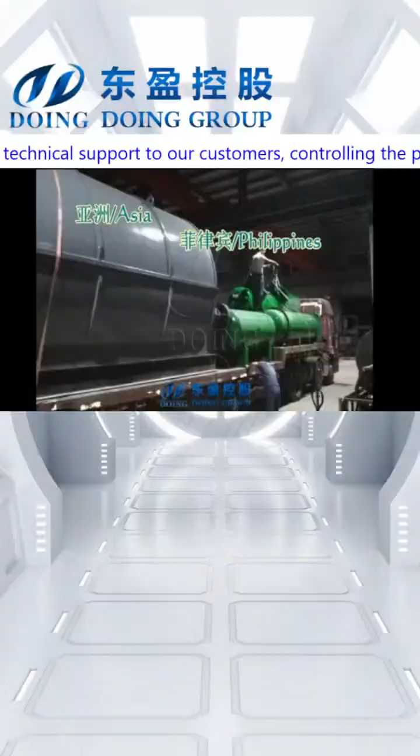Today we're going to share some information about our project cases from different continents. We are a manufacturer of waste tire, waste plastic pyrolysis plants. If you're interested in this kind of business, you can contact with us.

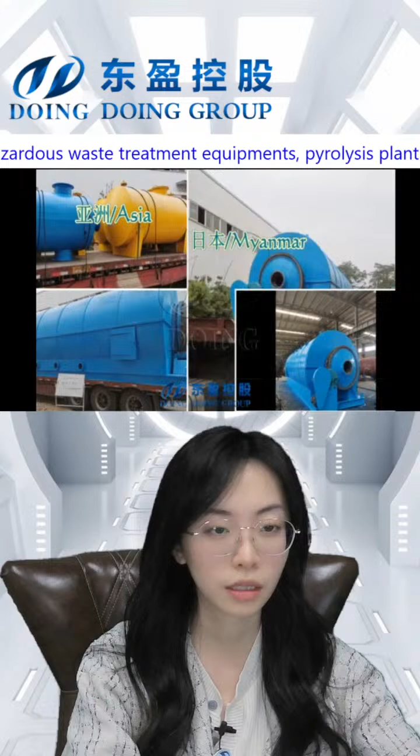So what can our equipment do? We build equipment for the pyrolysis business. We can process waste tire, waste plastic, oil sludge, like coal tar oil sludge, using pyrolysis technique to get fuel oil, carbon black, steel wire, aluminium ingot, or other products like powder or coal powder. This is what our project can do.

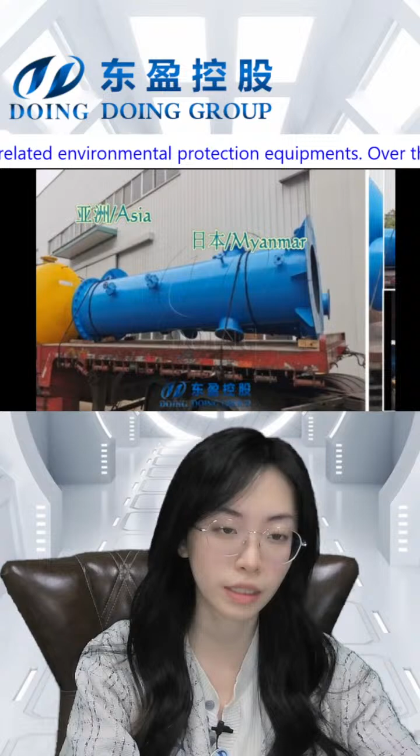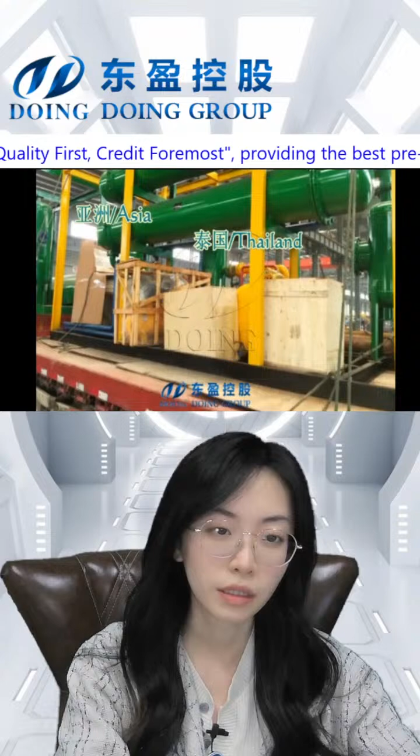Different products depend on different raw materials. We have two kinds of raw materials: solid waste and hazardous waste. Solid waste mainly includes waste tire, waste plastic, and some construction waste, daily waste, medical garbage.

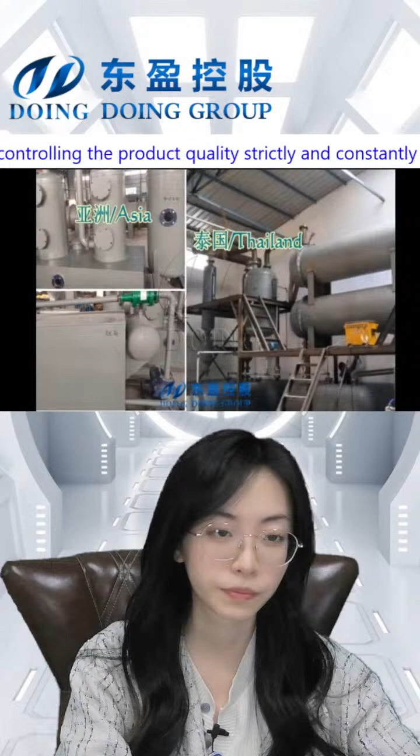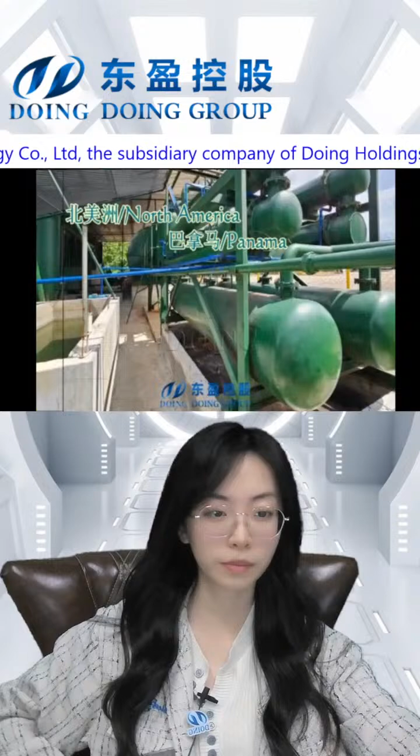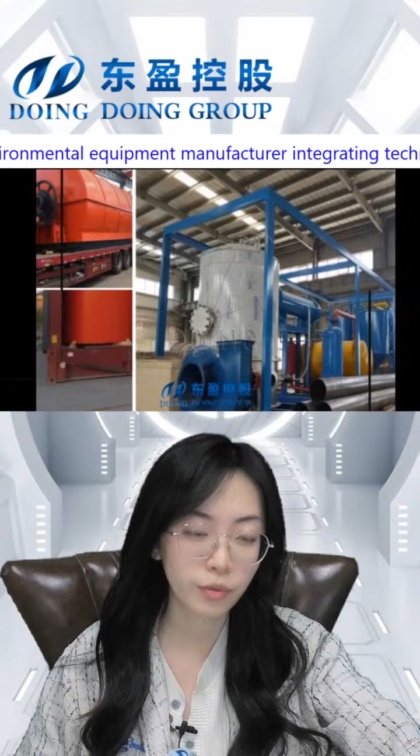This is what our company does. We are a Chinese manufacturer located in Henan province, China, and we have our own factory in Jiaozuo City, Henan province, nearby our company. The factory occupies more than 40,000 square meters. It's very large, with many prototypes and equipment waiting to be delivered.

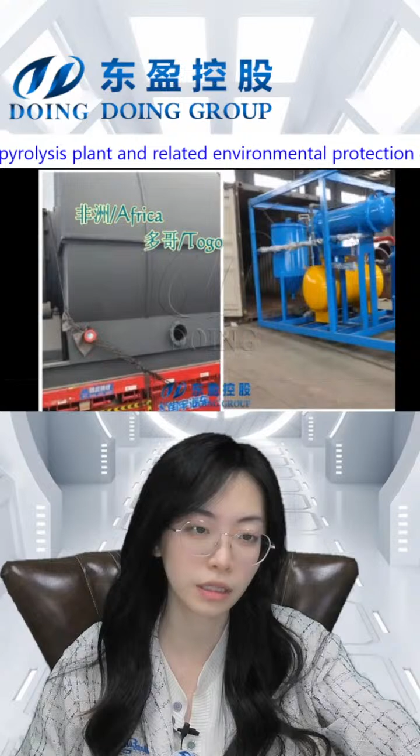You can come here and know more details about the equipment. The most expensive part of this equipment is the reactor. You can see how the reactor is built, what materials we use, and what techniques ensure high efficiency, long service life, and a safe production environment. This is some pre-sale service for you.

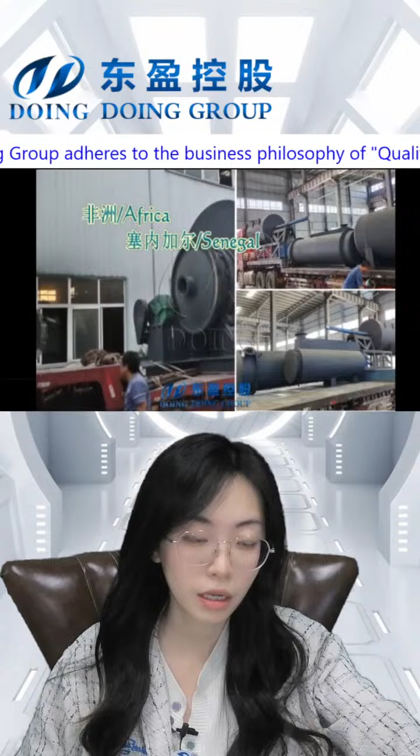You can come here if you want to do an experiment about your oil yield, depending on your material. You can also send your material to us at our factory, and we can give you a free service to test your raw materials. This is the service we can give you.

In this video you can see project cases from all over the world. Now it shows South America. Can you see here is the reactor for waste tire. We have three kinds of equipment: the batch type pyrolysis plant, the fully continuous pyrolysis plant, and the semi-continuous pyrolysis plant.

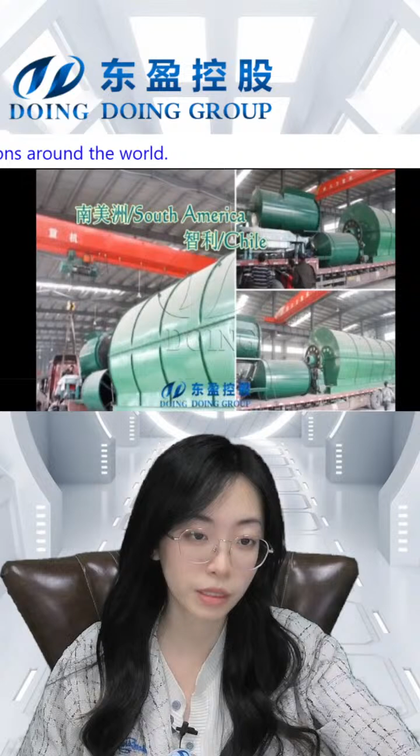What is the best equipment depends on your material, your capacity, and what device you need. It depends on your material - like if your material has paraffin, you need a dewaxing system, or you may need an odor removal system, or a pre-processing system.

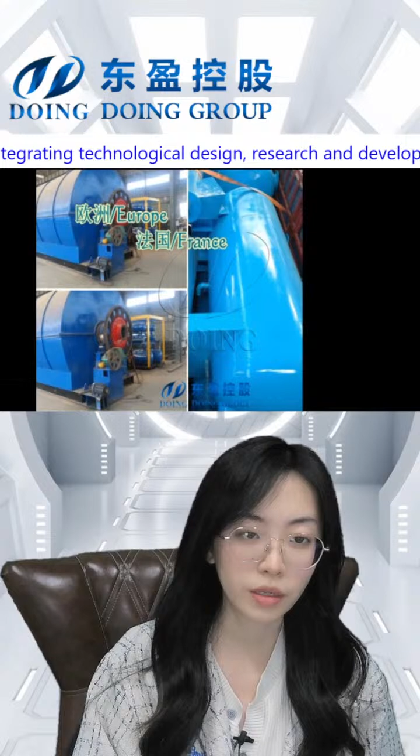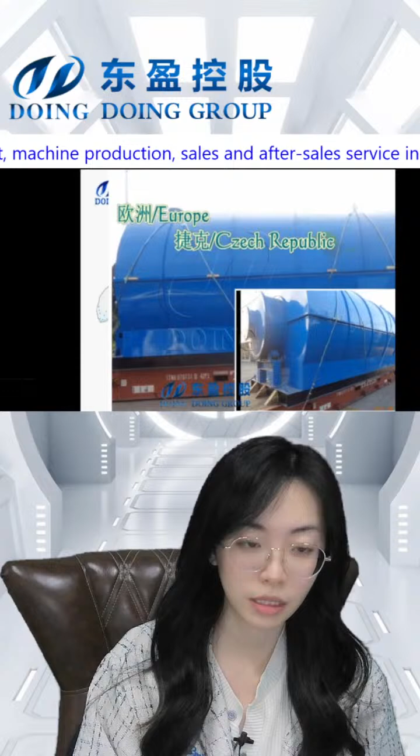Let me introduce our company again. We are Doing Group. We are one of the subsidiary companies of Doing Group, which has 7 companies. This company is one of the branches that serves waste tire, waste plastic pyrolysis equipment, and waste engine oil, waste pyrolysis oil, waste lubricant oil distillation equipment.

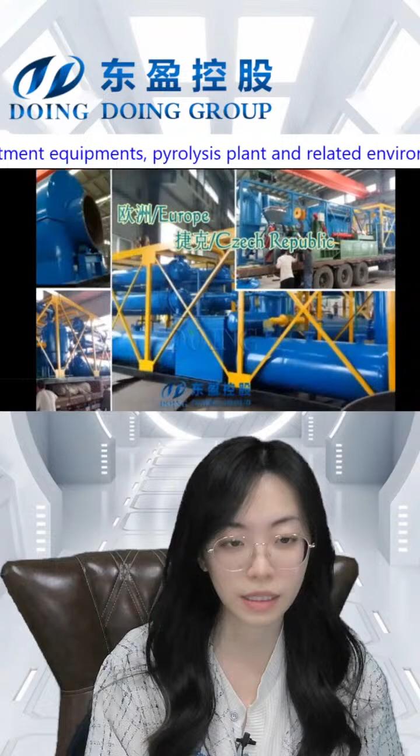There are 2 kinds of equipment, so if you need them you can contact us. These 2 kinds of equipment have different raw materials and different capacities, so they have different configurations. We can give you a program depending on your requirements, or we can design a different plan for you.

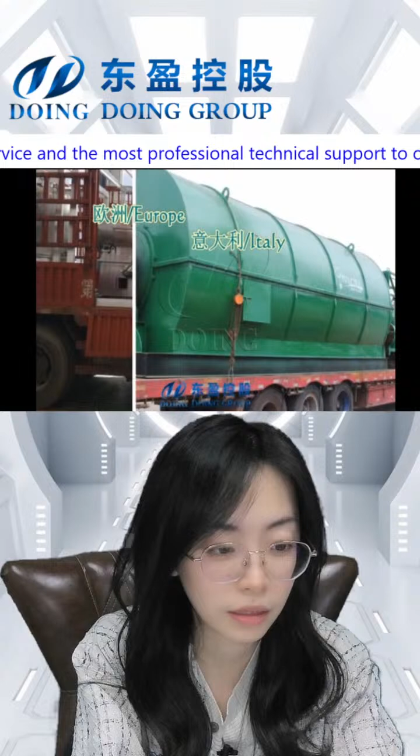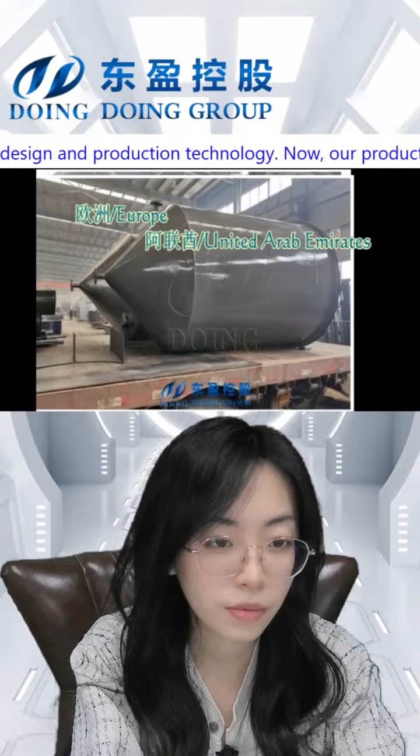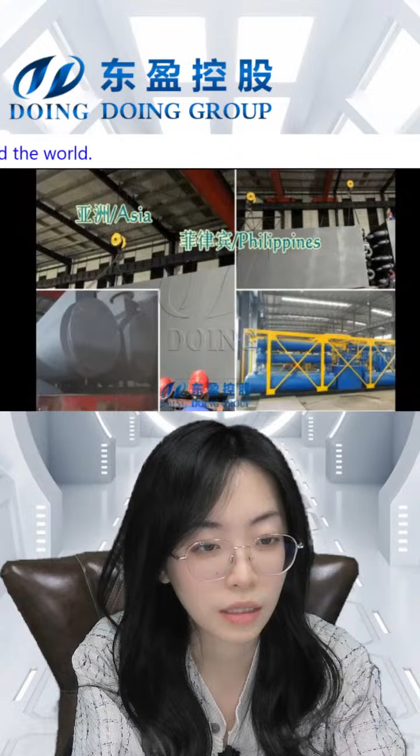We can introduce you to our equipment, their advantages, what materials they can deal with, and how many materials they can process every day. We can also give you an introduction to our project cases, like which countries our customers are in and what different customers bought from us, as well as the parameters and technique of the equipment. So what are you interested in?

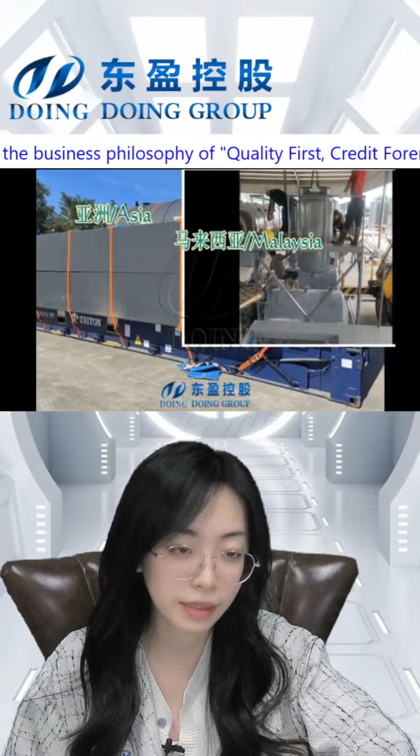Some of these are just daily waste that we can't just dump randomly. We purify them using distillation technique to upgrade the quality of the oil. The products we get are fuel oil and non-standard diesel that can be directly used in agricultural machines, mining machines, or diesel generators.

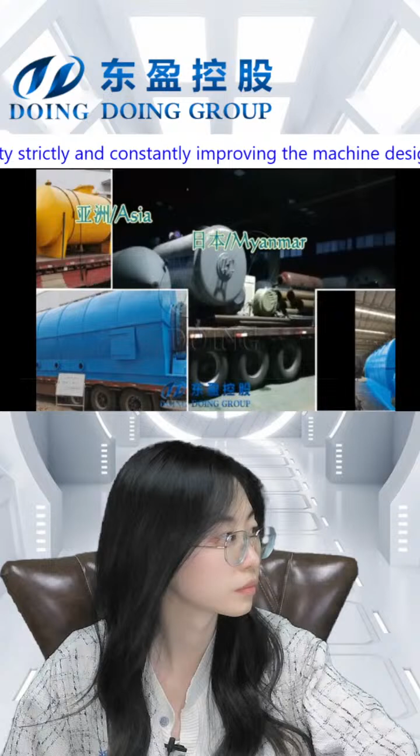So if you have any questions, just leave them. Here are also some customers in Thailand, because we are now in Asia, so we have many customers in Asia. But on other continents too, we have customers in South America who bought our batch type pyrolysis plant, and in Africa most of our clients bought the batch type.

In Europe, America, Russia, and some other countries, customers bought the fully automatic continuous pyrolysis plant. This newest technique is larger, has higher efficiency and bigger capacity. It's also much more expensive, but the efficiency is much higher, so we can process more materials with the fully continuous pyrolysis plant.

This is the customers in Thailand. Here are some pictures of equipment waiting to be delivered at our factory. You don't need to worry about the transportation.

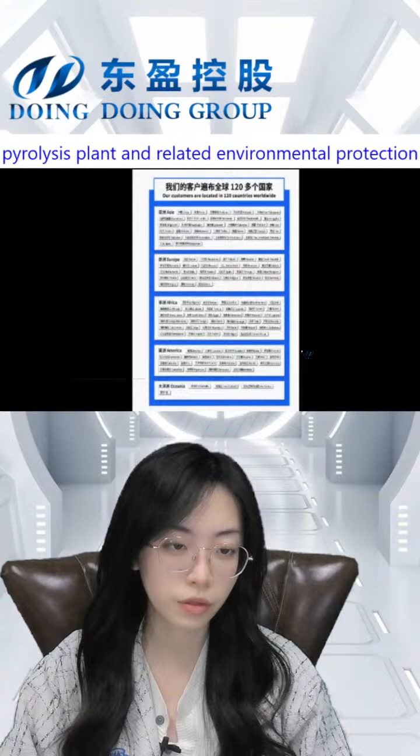We have a cooperating company to help you, whether you are in China or on other continents, so don't worry about the shipping problem. Also, if you're worried about installation, if you have an engineer you can build and install it yourself. But if you need our engineer, our engineer can come to your workshop to help you with installation, operation, and debugging the system.

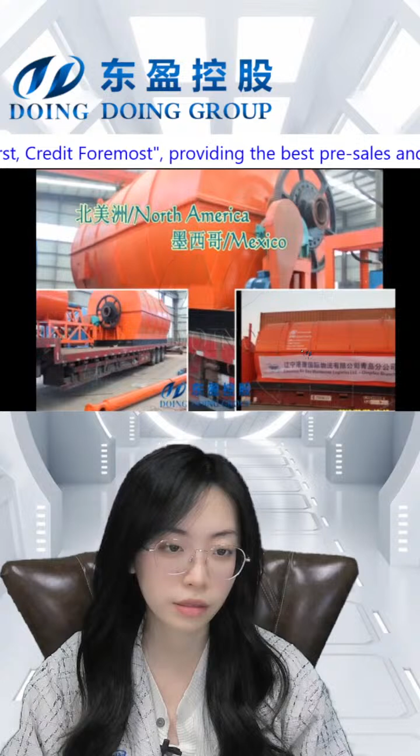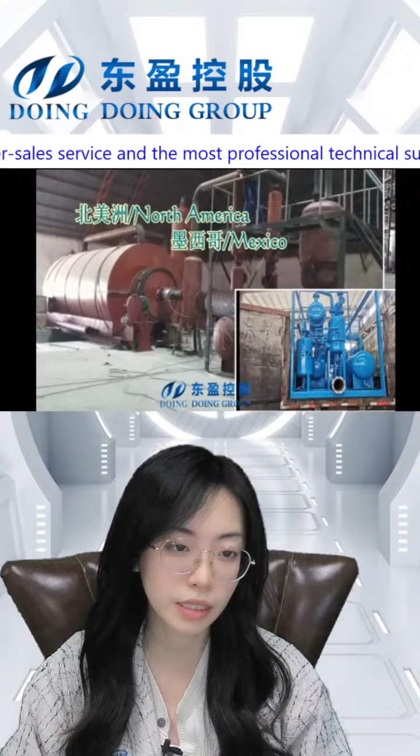Training can also be provided by our engineer. Training the workers for 3 to 5 days can help you know more about how to run our equipment more efficiently and in a safer environment.

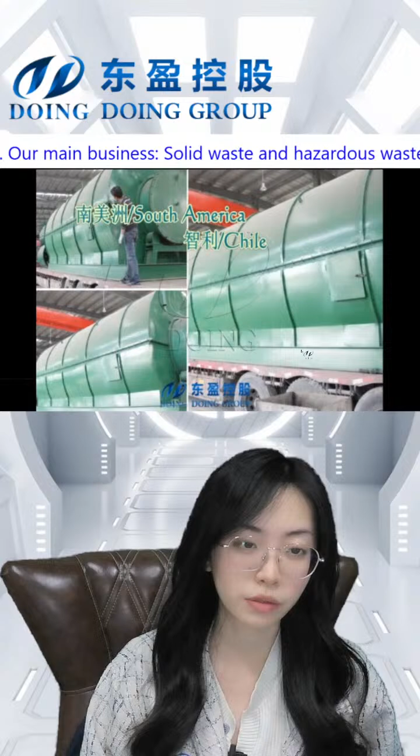You can come to visit our client's factory in your continent or region. But if you want to visit, you need to contact our sales manager first, and we'll tell you when it's convenient for you to visit there.

Here are some customers in Europe. This is a pyrolysis plant unit for smaller capacity, which you can use privately or at some college. Customers bought this kind of equipment to experiment and to learn the data, or for private use, like some farmers or small factories who need burning energy or diesel will have the pyrolysis unit.

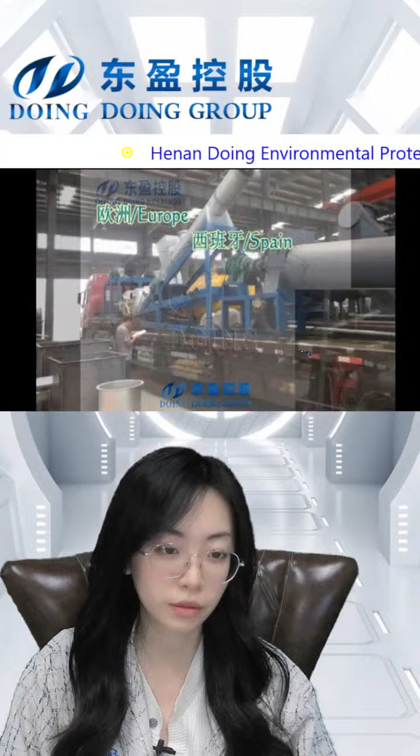These are also some countries, some customers in Europe, because the policies for purification systems or environmentally friendly ways are strict in Europe. So we have different programs to help you purify the gas release. We have high quality purification devices, normal size and normal type. Depending on your region and your policy, we'll give you a program so you can get the certificate for the purification system.

Is there anyone in my live show? We are Doing Group, building equipment that can be used to pyrolyze waste tires and waste plastic, and get fuel oil, carbon black, and waste steel wire from these waste materials.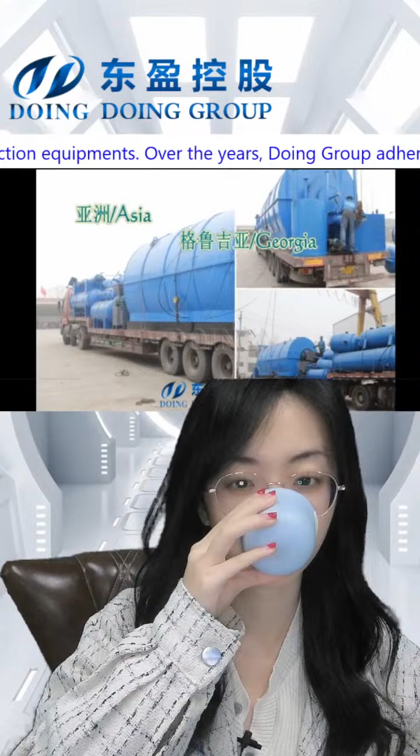There are some cases from our company at Doing Group, and here are some pictures of our clients and videos of our factory. Here is our factory in Jiaozuo City, Henan Province, China. Here is one of the workshops for the reactor. You can see here the prototype. If you come here, the first machine you will see is this 15 ton batch type pyrolysis plant. Here is the reactor, and here is the condensation system.

This is one of our clients in Shanxi Province, China. Their raw material is oil sludge, coal tar oil sludge.

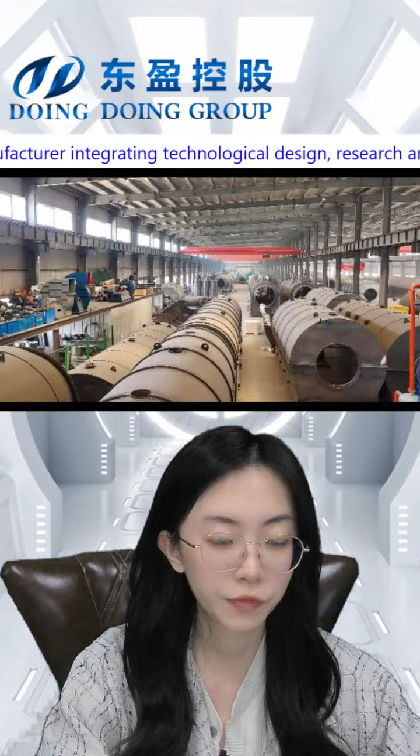So here is some information about our company and our clients, you can have a look. During this live show, if you are interested in some equipment, you can leave a comment, and I can give you a brief introduction of this equipment or client information.

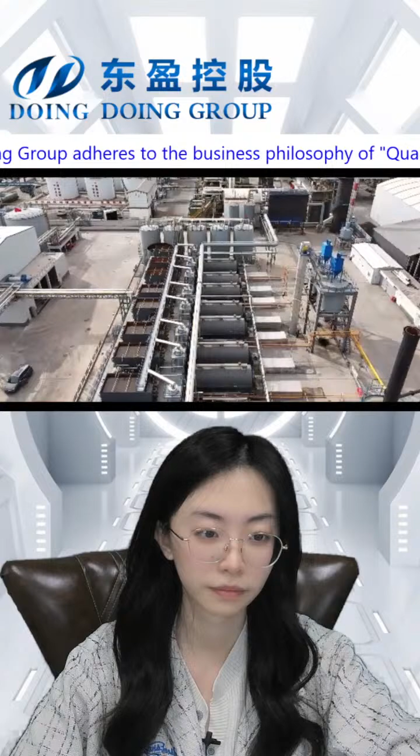And now let's have a look at some information about our company and our equipment. Well, this is our catalog. You can see here some pictures of our company.

It's located in Zhengzhou, so it's very welcome for you to visit. You can see how many employees we have and how large our company and factory are.

Here is some information about our company. This is the company and this is the factory. It's located in Jiaozuo City, Henan Province. You can see here the reactor. We have 2 workshops, one for the reactor and another for other devices like the cooling system, the removal system, and the slagging system.

Here is the name of our company. We are one of the subsidiaries of Doing Group, and our company's name is Henan Doing Environmental Protection Technology. Henan is the province name. We have business for 2 types of equipment: one is the pyrolysis plant, the other is the distillation plant. So there are 2 choices for you if you're interested in our service.

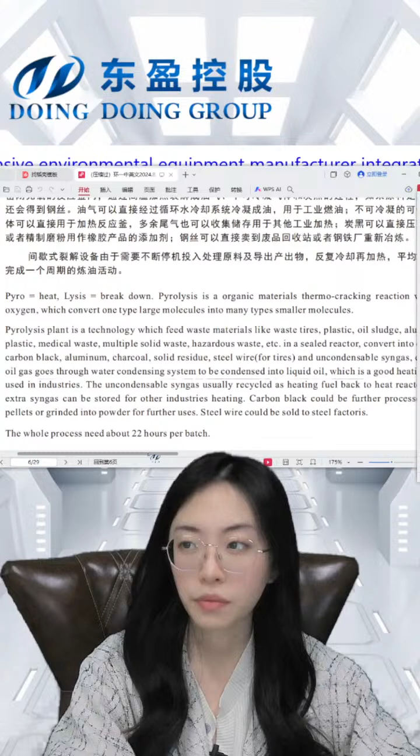This is the batch type pyrolysis plant. What is pyrolysis? 'Pyro' is heat, and 'lysis' is breaking down. So pyrolysis is an organic material thermal cracking reaction without oxygen. We use a sealed design to ensure there's no oxygen inside, which converts long molecules into smaller molecules. This is the principle of it.

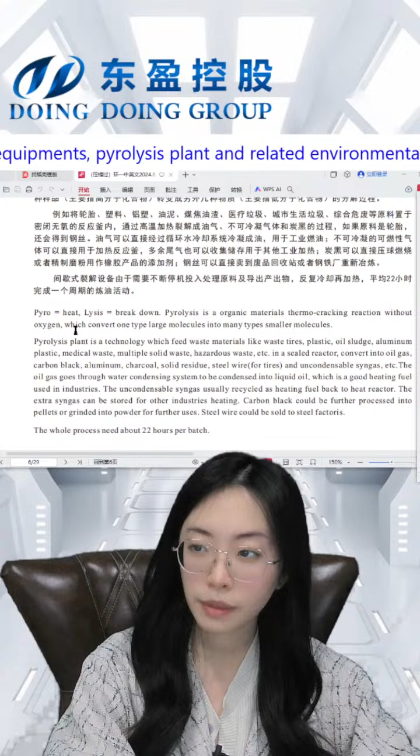The pyrolysis plant is a technique which feeds waste materials like waste tire, plastic, oil sludge, aluminium plastic, medical waste, municipal solid waste, and hazardous waste into a sealed reactor, converting them into oil and gas, the main products we can get.

The oil gas then goes through the water condensation system to be condensed into liquid oil, which is a good heating fuel used in industries like brick factories, glass factories, agricultural machines, or cement factories.

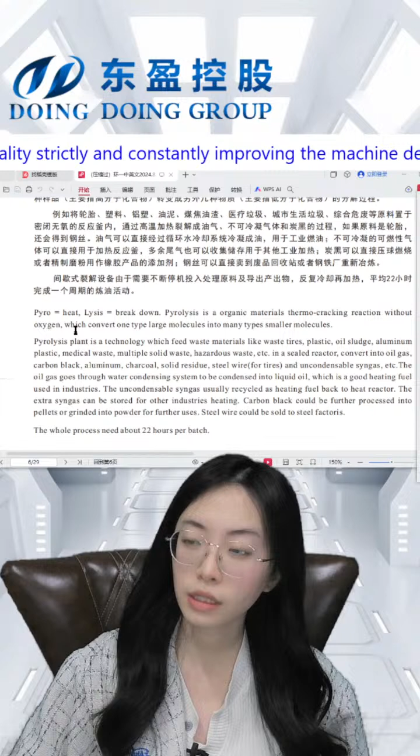Other products we can also get include carbon black, aluminium plastic charcoal solid residue, and steel wire from different kinds of raw materials. The gas can be used as heating energy, and the uncondensable syngas is usually recycled as heating fuel back to the reactor, passing through an odor removal system.

The extra syngas can be stored for other industrial heating. Carbon black is further processed into pellets or ground into powder for further use. Steel wire can be sold to the steel factory or remelted. These are the different ways to use the products.

The efficiency of the batch type pyrolysis plant is about 22 hours per batch, nearly one batch per day. This is the capacity and the efficiency.

The biggest one is 15 ton -- that's the normal one, and most of our clients choose 15 ton. Actually the biggest one is 20 ton. We also have 10 ton, 12 ton, and 18 ton versions of the batch type pyrolysis plant.

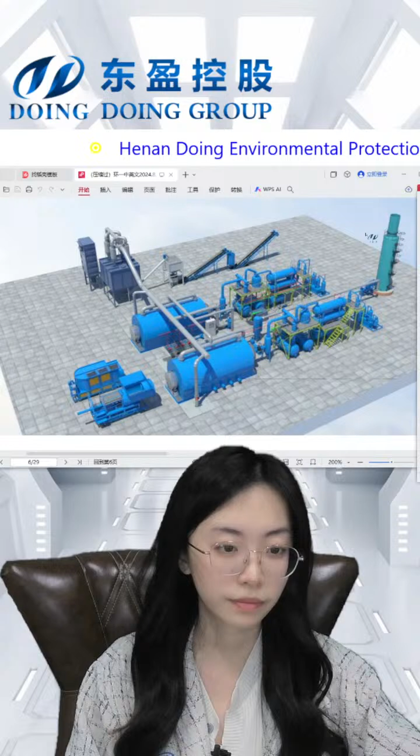This is the whole industry process of the waste tire pyrolysis business. Any questions you have, you can just leave them.

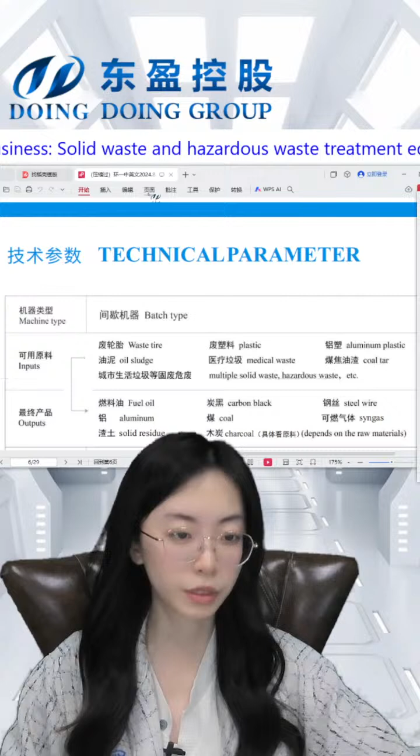Here are some parameters of the batch type pyrolysis plant. This shows the materials and products, just the input and output that we can get. For example, if your material is waste tire, then we can get fuel oil, carbon black, and steel wire.

The oil yield of waste tire is mainly 40%, depending on the type of tire. And if your material is plastic, then the products would be fuel oil and carbon black.

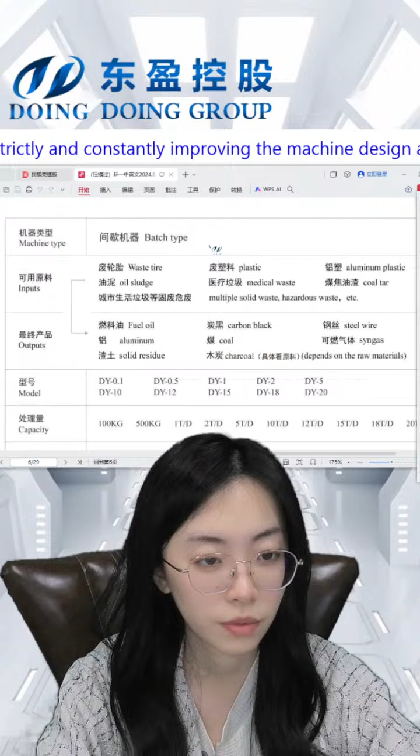Or if you have other materials like oil sludge or coal tar oil sludge, we will have different oil yields and different products. If you have materials and don't know the oil yield, you can send your material to our factory for a free experiment. We'll tell you the oil yield, run experiments on the different products, give you an analysis, and provide a program showing whether this business is profitable for you and how much profit you can get. This is all a free service we provide.

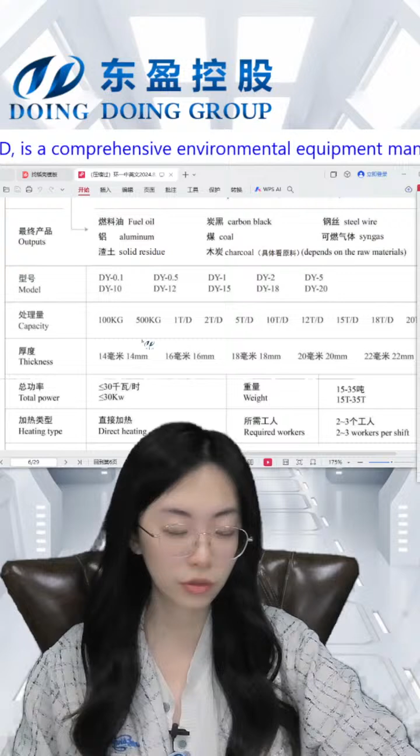Here are the models. The model just relies on the capacity. The biggest one is 20 ton, and the smallest one we have is 100 kilogram per day. If you chose small capacity, it is a frame design.

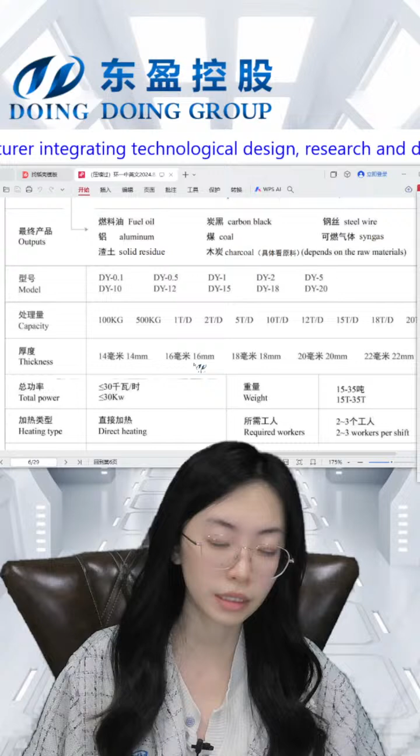The largest one is 20 ton. Most of our clients will choose 15 ton, 18 ton, 20 ton, because we use almost the same energy and the same workers, but you can process more materials per batch.

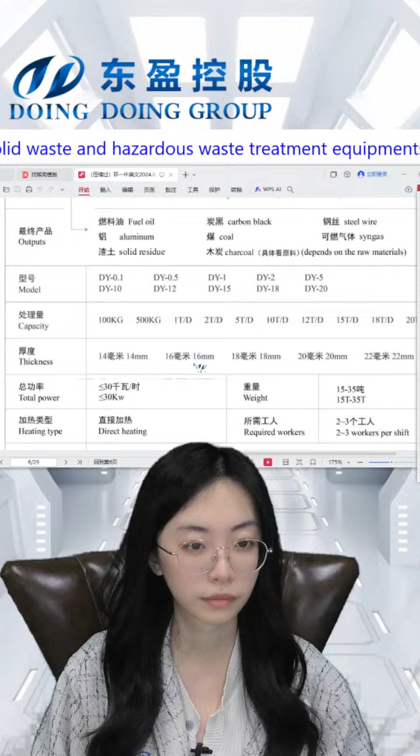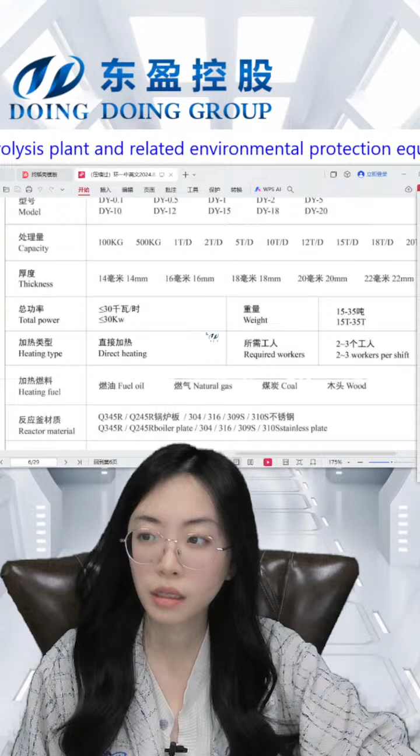Here is the thickness of the reactor. Some total power, weight, heating type, required workers, you can have a look. If you want this pamphlet, you can contact with us and we'll give you this introduction.

For example, the land occupied size of the batch type is 200 to 300 square meters. The width is 7 to 10 meters, and the length is 15 to 30 meters. This is for the batch type pyrolysis plant.

If you bought a 6 line of the batch type, then it will occupy 1080 to 2000 square meters. This is the sizes.

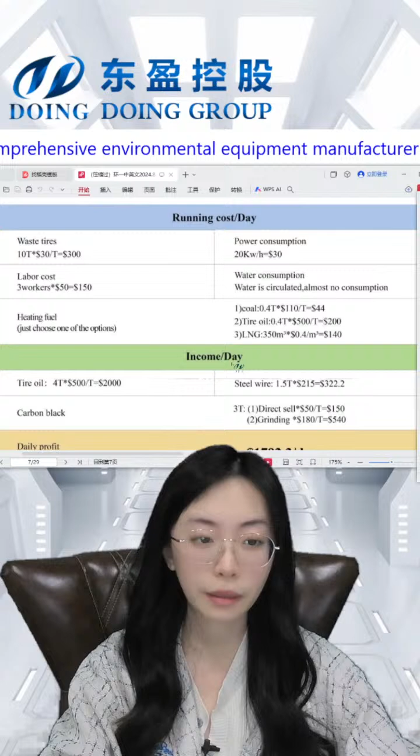It shows the running cost every day and the income. You can see which several steps it will cost while having this production.

Like the material, the waste tire, and the consumption of the power, the heating energy, and also the labor cost, water consumption.

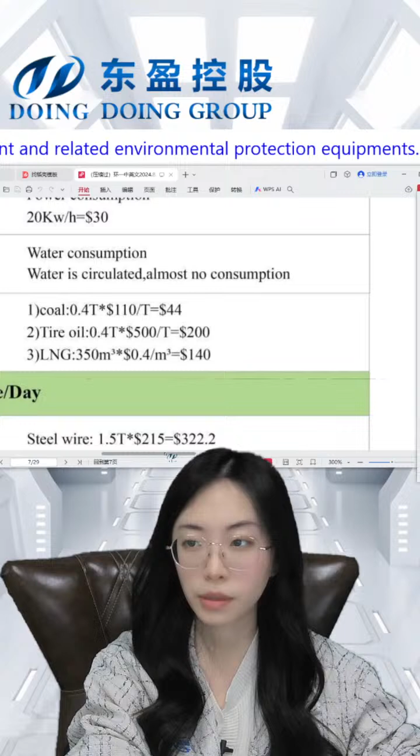Well, I can see here it shows the water is circulated, so there is no consumption of water. The water is used at the condensation system, using cooling water to cool down the fluid oil into liquid oil. So we will use water, but the water is also recycled and circulated, so there is no waste about this. You don't need to worry about it.

Here is a heating fuel. By using different materials, the cost is kind of different. For the heating energy, we can use syngas, natural gas, or heavy oil.

Then this is the income. The income every day for the waste tire will depend on the products, like the oil yield we can get. If you have 1 ton every day, then we will get nearly 400 kilograms of fluid oil. The steel wire occupies nearly 15%. Then we will get 35% carbon black and 10% syngas.

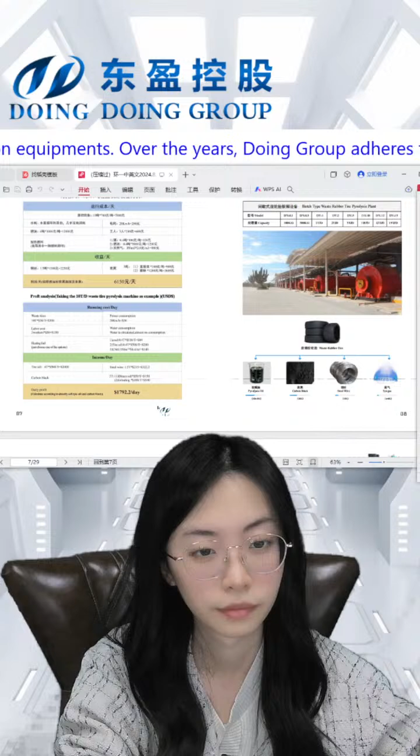If your material is waste tire, then we can get 35% of pyrolysis oil, 35% of carbon black, 15% of steel wire, and 10% of syngas. Then it comes to some other products.

If you get paper mill waste, the dry one can reach an oil yield of 60%. And the wet paper mill waste is randomly 20%. This relies on several solutions and conditions.

Here is oil sludge. If your material is oil sludge, then this is a hazardous waste, so there are some unique designs of the reactor and other devices.

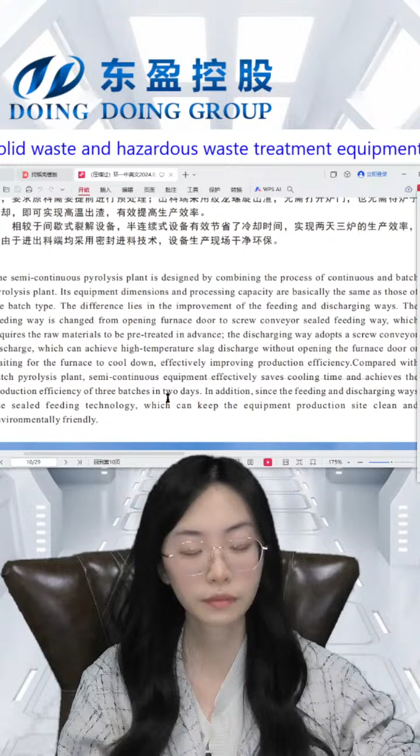Efficiency is 3 batches for 2 days, and the same as the batch type models: 1 ton, 2 ton, 10 ton, 12 ton, 15 ton, 18 ton, 20 ton. You can see here. Is it clear for you to watch this?

You can look at this. Some brief introduction about the batch type pyrolysis plant.

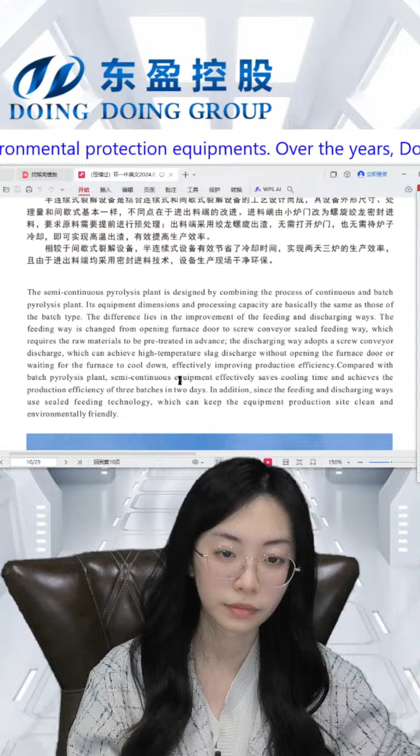The semi-continuous pyrolysis plant is designed by combining the process of continuous and batch type pyrolysis plant. This equipment's dimensions and processing capacity are basically the same as those of batch type. The difference lies in the improvement of the feeding and discharging way. The feeding way is changed from opening the furnace door to a screw conveyor sealed feeding way. This is why we can work continuously, which requires the raw material to be pre-treated in advance.

The discharging way adopts a screw conveyor discharge, which can achieve high temperature slag discharge without opening the furnace door or waiting for the furnace to cool down, effectively improving production efficiency. Compared with the batch pyrolysis plant, the semi-continuous equipment saves cooling time and achieves the production efficiency of 3 batches in 2 days. In addition, since the feeding and discharging ways use sealed feeding technique, it can keep the equipment production site clean and environmentally friendly.

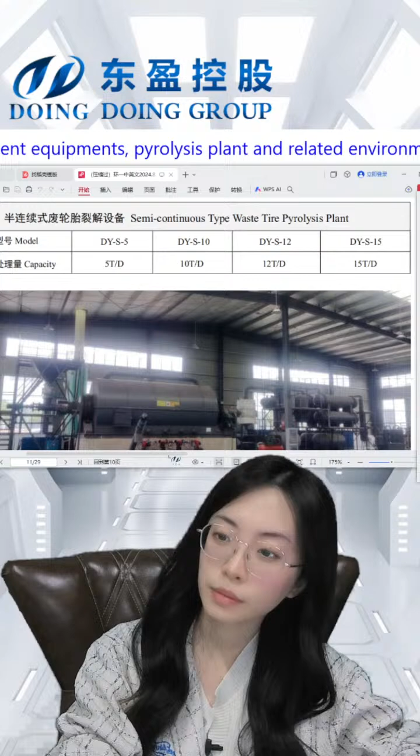Here are some models of the semi-continuous type. Most of what we have is 15 ton, a bigger one is 20 ton. Most of our clients will choose 15 ton if your material is waste tire.

This is a picture of our clients in their workshop. They chose one semi-continuous type pyrolysis plant, and the cooling system they chose is the tube condensers. We will have 7 condensers for 4 steps.

The materials we need to use require some pre-processing. If your material is waste tire, then we need to crush it into rubber powder. Then we can get the pyrolysis oil, carbon black, and syngas. And if your material is plastic, we need to change it to the pyrolysis oil, to change it to the plastic particles.

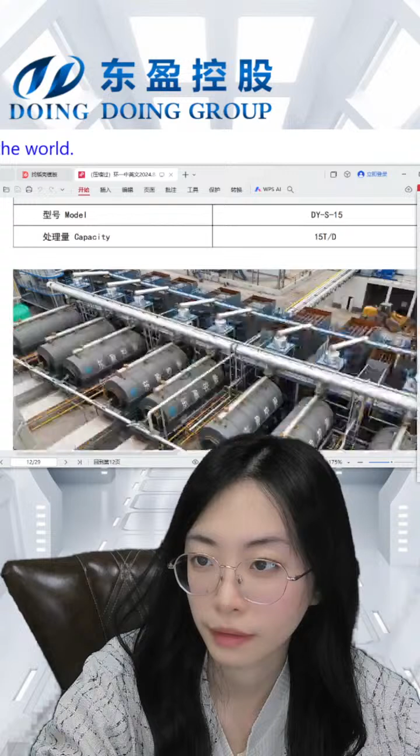Here are some project cases of the semi-continuous type. This is the customers that chose 15 ton.

And here is a material, but there are some strict requirements to get the oil sludge for a semi-continuous pyrolysis plant. The state of the material needs to be liquid or semi-liquid. If there is too much soil in it, it can't discharge the residue of the oil sludge.

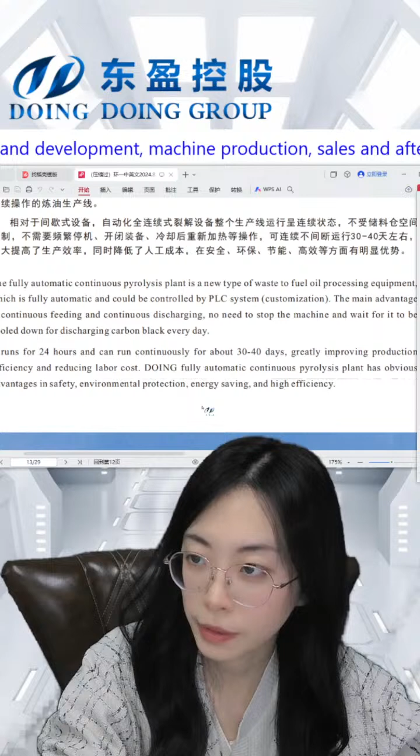And the last one, fully continuous pyrolysis plant. The fully automatic pyrolysis is the newest type of the waste to fuel oil processing equipment. It's just designed in these recent years, which is fully automatic and controlled by a PLC system.

The main advantage is continuous feeding and continuous discharging. No need to stop the machine and wait for it to cool down for discharging carbon black every day. It will run 24 hours and can run continuously for about 30 to 40 days, greatly improving production efficiency and reducing labor cost. This fully continuous pyrolysis plant has obvious advantages in safety, environmental protection, energy saving, and high efficiency.

This is a brief introduction of the fully continuous one. And this is a 3D layout.

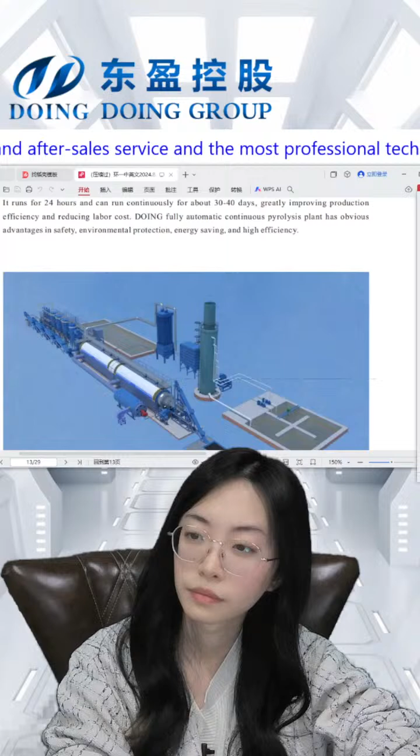Well, just the same: the feeding system, pyrolysis system, cooling system and discharging system, and this is a purification system. This pool is for the circulating water and the purification water.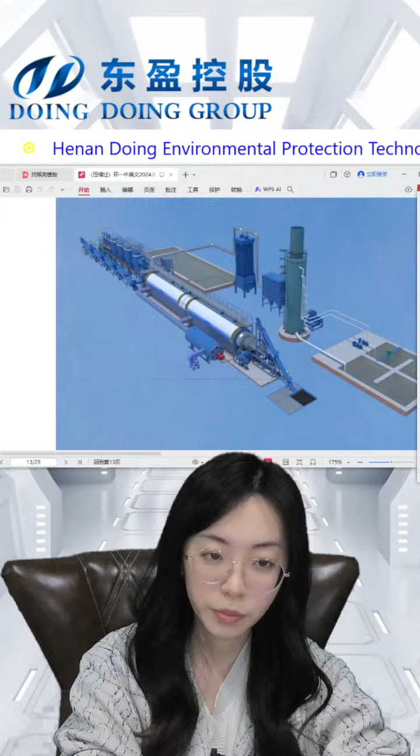The reactor has two sections because it's such a long reactor that we design it at 26 meters for the 50 ton. So it has two sections, and in the middle of it is a high temperature resistant tube. And the heating system uses the hot wind furnace.

Because it's just the old design, we use the burner. We need 8 burners and 10 tail gas burners, so it's hard to control the temperature. So we use the hot wind to annularly control it, to monitor the temperature and have it controlled. And then for the slagging waste, we use the winch slag.

It will have a water cover to cool down the carbon black at the same time when we discharge. And the device set above is the cooling system, tube condensers, or you can choose the water tank condensers.

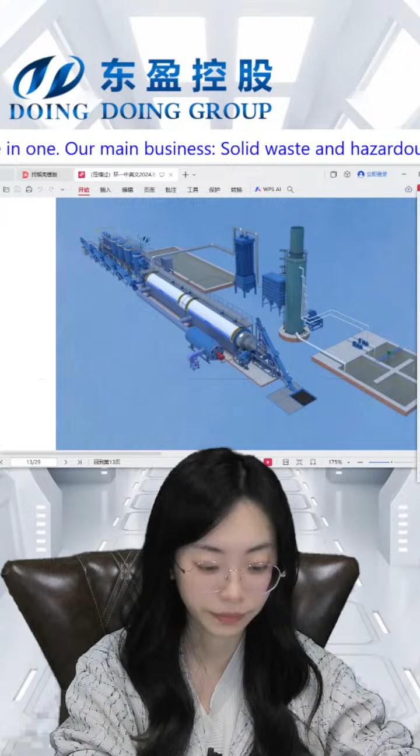And then this is the purification system to purify the gas that we need to release. This is the purification tower to purify some sulfur oxide or other dust. And this is a 3D layout.

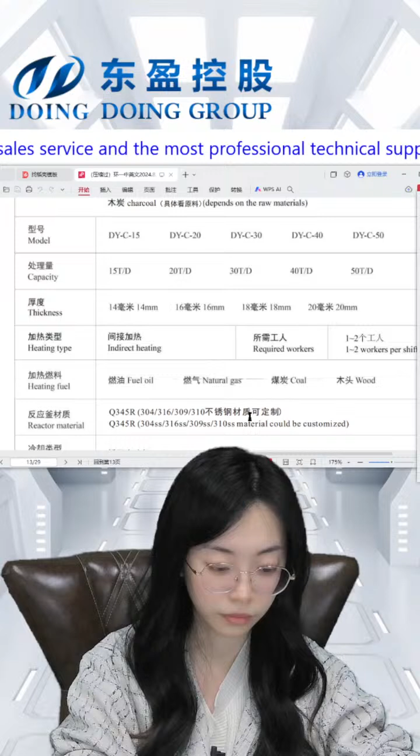This uses indirect heating because we only need the combustion system for 45 to 60 days, so indirect heating is better to prolong the service life of the reactor. It requires only 1 or 2 workers because we use the PLC system, which makes it much more automatic to control.

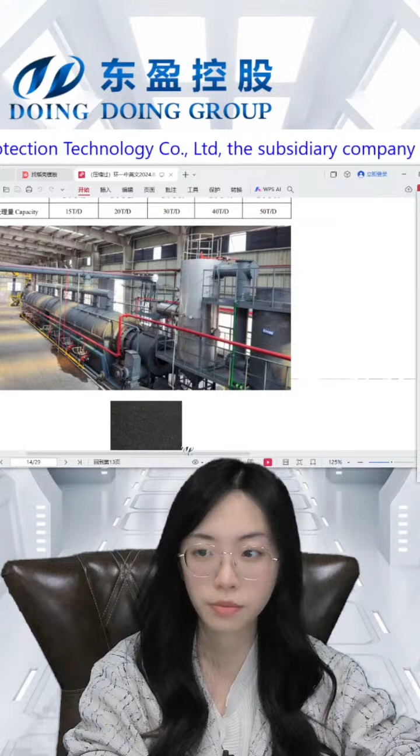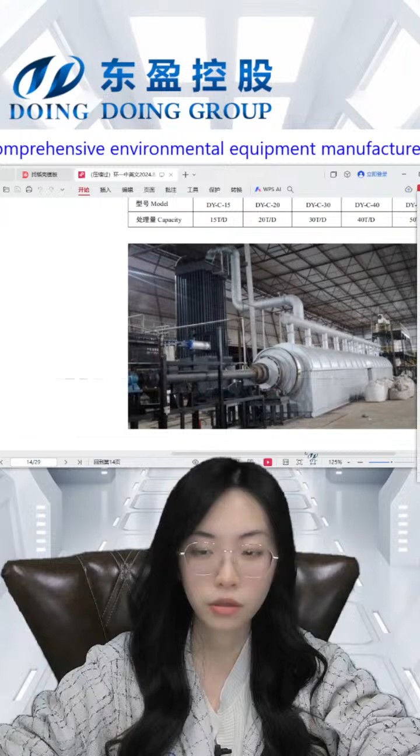These are some pictures of the fully continuous one. If you want to come visit, you can contact our sales manager. This is a customer in China, and here is a customer abroad in Brazil. Both of them are 50 tons per day.

This shows what we can use the pyrolysis oil for: the steel factory, blower factory, heavy oil generator, cement factory, and it can be refined to diesel for use in diesel generators, diesel heating flues, and heavy machinery.

The carbon black can be used for heating, burning, and refining. Also, the black powder is a material for rubber, tire, and paint production, and we can do deep processing. The steel wire can be remelted or sold as scrap.

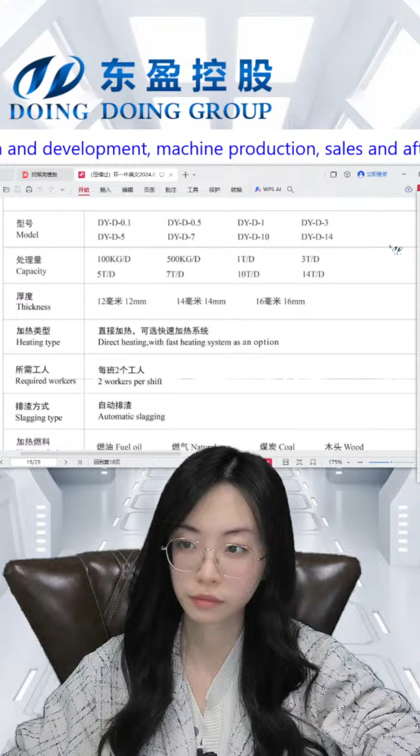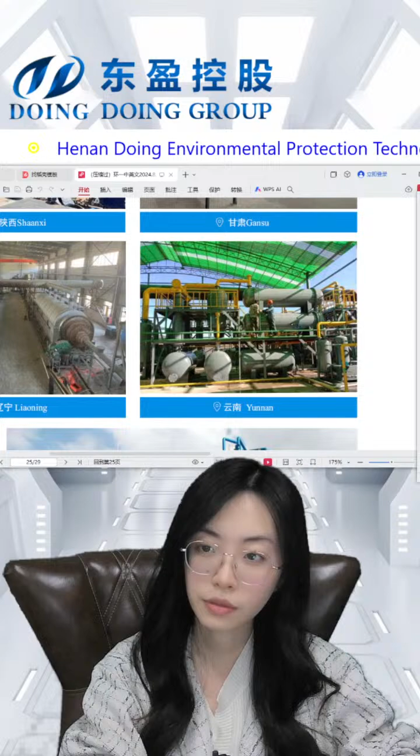Here are some project cases in China: Shaanxi has 8 lines of the batch type; Gansu has a semi-continuous pyrolysis plant; Liaoning has a fully continuous pyrolysis plant and also a batch type, here with tube condensers; and this is a distillation equipment in Yunnan province.

So do you have any questions about our equipment or the data we use? If so, you can leave them. In our common place we have our WhatsApp - you can contact our sales manager directly.

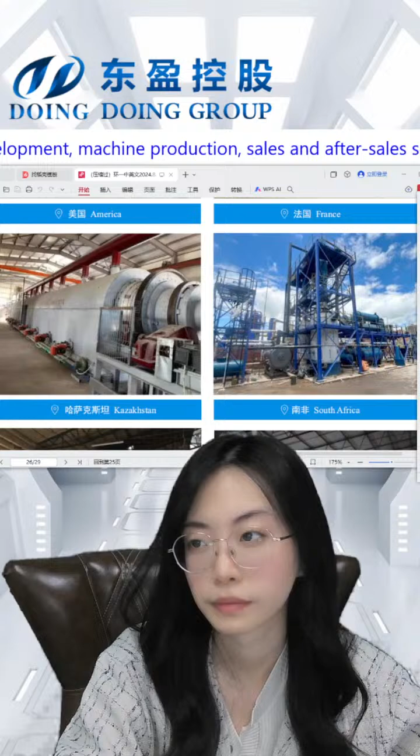Here are some project cases abroad, like America, France, Kazakhstan, South Africa, Mexico, Brazil - this one is a fully continuous one - Georgia, and Colombia. Nowadays we have clients in more than 120 countries, so it's very convenient for you to visit in each continent.

This is today's live show. These are some certificates. Any questions you have, you can send a private message to us and our sales manager will contact you immediately. For quotations and certificates, our sales manager and engineer will provide service for you.